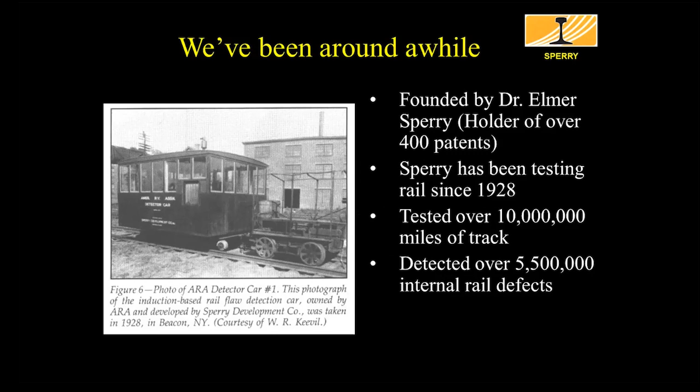These numbers are a little old. It said we tested over 10,000,000 miles of track—well, that was back in 2000—and they detected 5.5 million defects. I'm sure there's a few more now.

So Sperry Rail facts, as of 2000, this is what they said: they were the first company to provide the railroads with rail detection service. They were the world's largest rail inspection company, and I'm sure they still are. Now they've got over 90 years of rail flaw detection.

They had 58 vehicles when I was there. I went through the numbers—I could never find out exactly what it is, but when I would look at the literature, it said they had 58 detection vehicles. It was over 50.

One of the things somebody asked me: Bob, what's ASNT when you say 100 qualified ASNT operational staff? These are the people that would actually do the rail verification on the cars, approved by the American Society for Non-Destructive Testing. At the time, they were the only company totally focused on rail flaw detection. Pandrol Jackson would do it, but they had other things with Harsco and such. Sperry Rail always focused on rail testing.

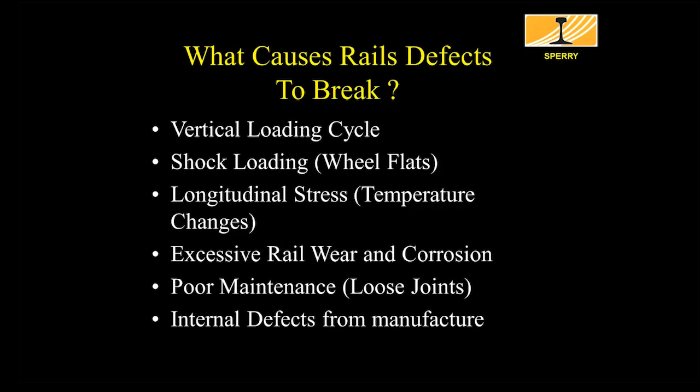And then of course there's internal defects from manufacturing. In the world of rail making today, it's less and less, but you can still have internal defects from manufacturing.

Funny thing, when we were at the Danbury Railway Museum, I had a picture of one of these cracked rails, and apparently Sperry must have given them the actual rail that was taken, that they took a picture of. So we had the actual rail along with the picture as part of my presentation.

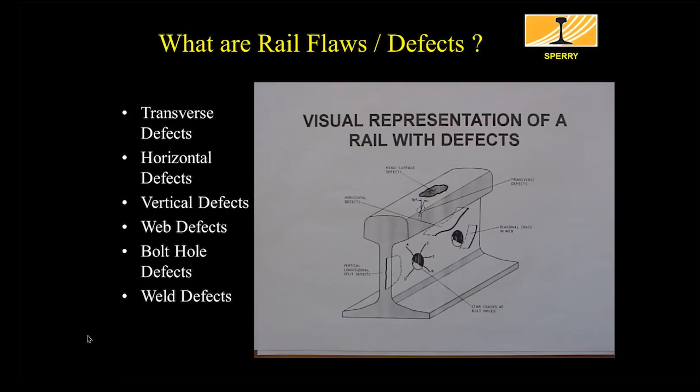And of course, now that we've got a lot more welded rail, you can get weld defects. You wouldn't have had those back in the early years because it was jointed rail, but certainly weld defects are things that can happen. So transverse defects, well, there's one.

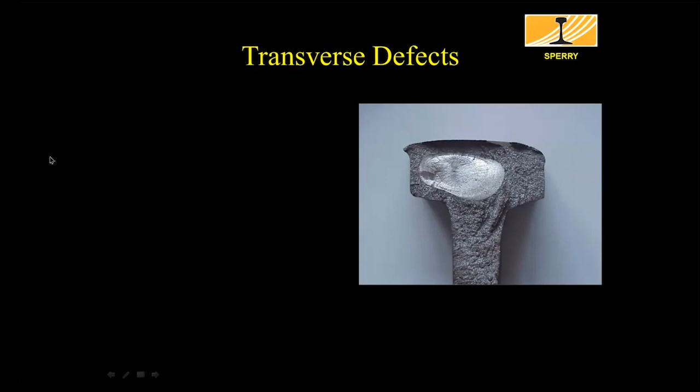This would probably have grown from that little pinpoint defect, and kind of like tree rings, as this thing would grow, you would detect it. So there's transverse fissures, compound fissures, detail fractures, reverse detail fractures.

These transverse defects, as you're going along with the rail, are usually at a 10 to 20 degree incline against the flow of traffic. Something like this obviously is a big problem. We would measure these things ultrasonically and find out how big they are. If you found a small defect and it was within guidelines, you wouldn't have to remove the rail or the piece of rail that had the defect.

This one, yes, the rail probably broke, and that's why it's there. But you'll measure it over time as you continue to inspect the rail.

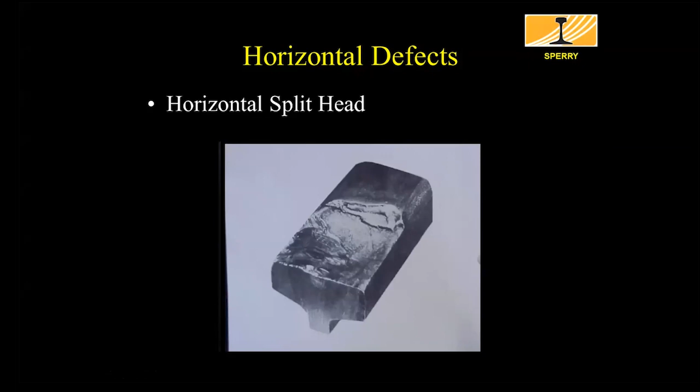Well, a horizontal split head. It's pretty well defined. Again, you can have them in the web, which would give you a cracked web, but that's an actual split in the head.

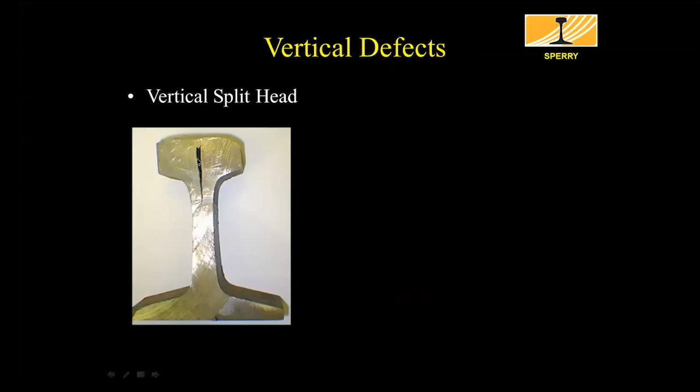This was taken on the Sperry Rail test track that was in Danbury, and you can see how it's just broken right through. When I was out in Pennsylvania riding on one of the high rail vehicles, we had the track out. There was a big vertical split head.

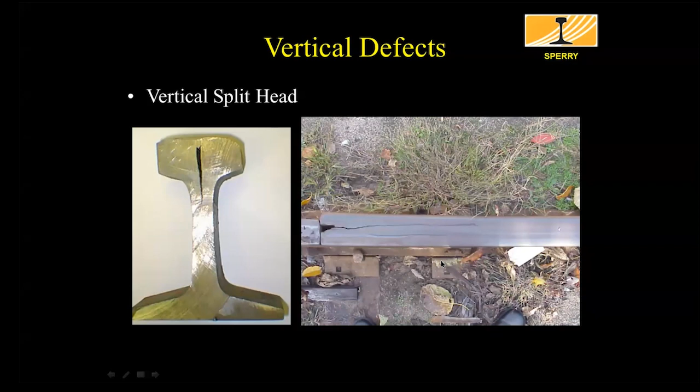Well, we shut the railroad down because, first off, you're on the track, but then they actually took the track out and replaced the rail that day because there was a vertical split head that ran quite a number of feet. Half of the head of the rail could have fallen down while the train was going over it.

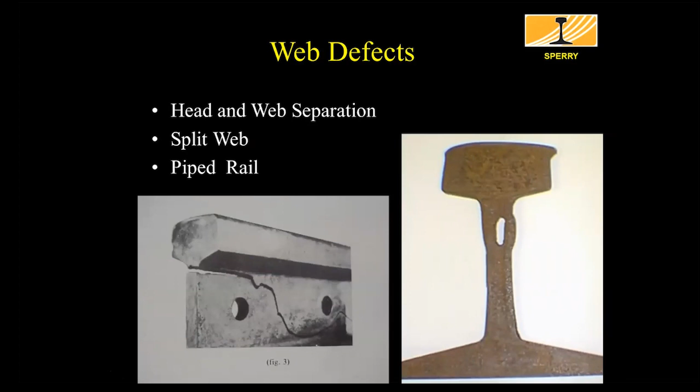So, yes, you can get web defects. And then we were talking about the bolt hole cracks.

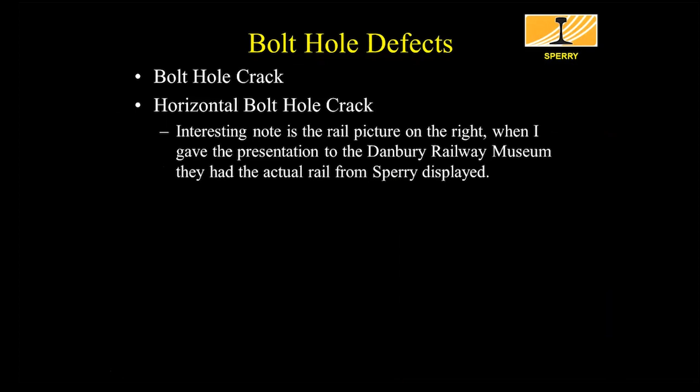Something I only found out when I saw a presentation last Wednesday over at Danbury. They were talking about what induction can do, and induction will not detect bolt hole cracks. I didn't realize that. Obviously, induction focuses on the head of the rail, but the ultrasonics give you all the good pictures of what's going on below the head.

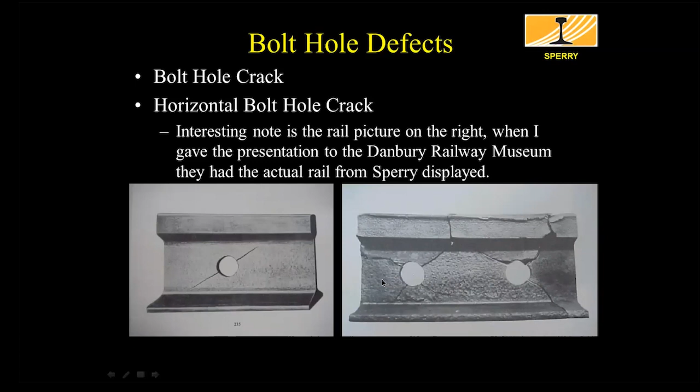With weld defects, this is what happens with the weld. The failure obviously occurs before you can see it. They grow very quickly once they develop, and service failures result, as you see, in a complete break on the head, the web, and the base. It just usually goes right through.

Well, now you've seen some of the defects. How is it detected? Well, the induction method is a surface and subsurface railhead method. That's what Elmer Sperry brought to the table back in 1928, putting a current into the rail and using a coil, checking to see readings when there were discrepancies.

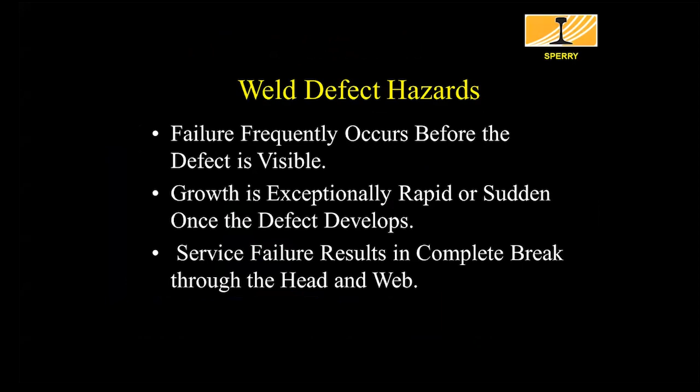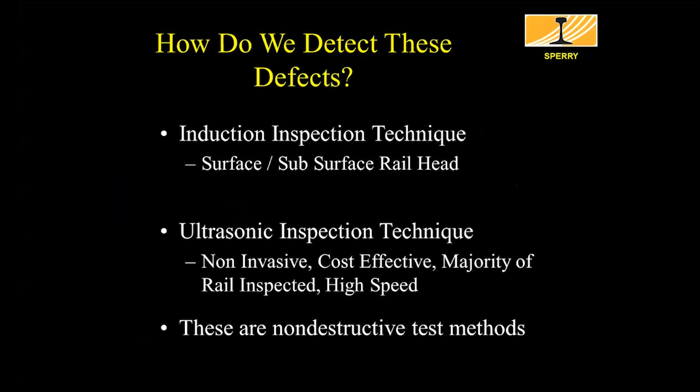So ultrasonic inspection is also called pulse echo. It's non-invasive, cost-effective, and this is what really gives you the picture of what the defects are. We're going to see a little bit more about how that's done. And again, these are all non-destructive test methods. You can certainly break rails and say, oh yeah, it's got a defect, but you can't do that when the rail is down, when the track is down on the ties.

Eddy current inspection would be very similar to the induction method of rail detection, energizing the rails and then detecting to see if there was a defect in it. Some of the original cars that they used back in the 30s.

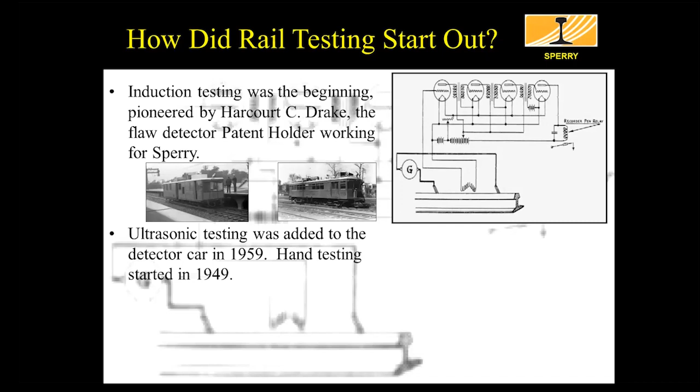And ultrasonic testing, Tom DeJoseph mentioned the other night that it came from Germany. I don't know if the RSU or the ultrasonic testing really did come from Germany, but they started it in 1959, according to Dr. Robin Clark. The hand testing was started in 1949, and you'll see when we take a look at the transducers why ultrasonic testing was a much easier way to find defects.

On the big cars, you'd normally have two ultrasonic roller search units, and you'd have the induction right next to each other. So we're going to see a little bit more about that too.

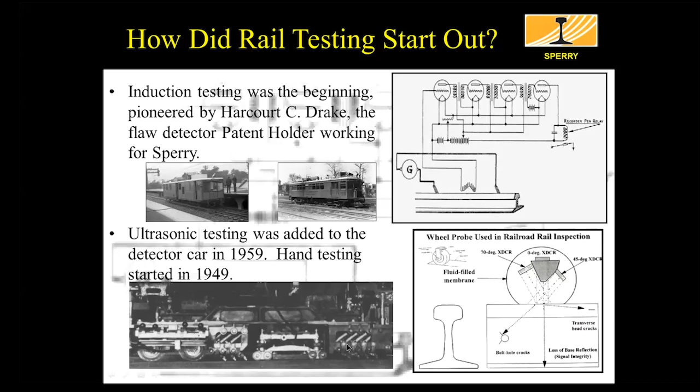So when you're going down the track, you can inspect both rails at the same time. And you can see that there's a lot of defects that you can find. The only thing that you can't find is a broken base. But chances are, if it's a broken base, the rest of the rail's intact, it may not be too much of an issue. And again, I just found out the other night that the induction testing did not detect bolt hole cracks.

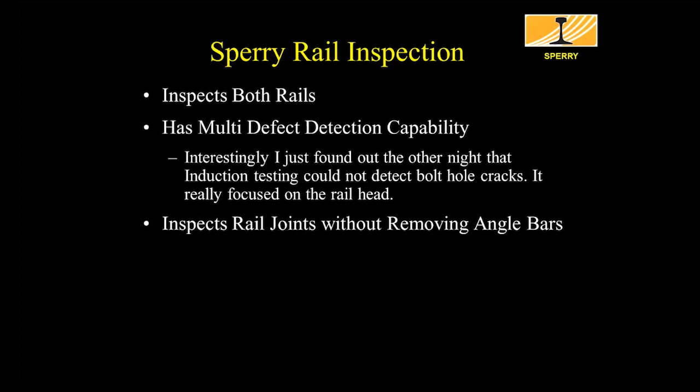So, and that's interesting because they were testing rail and jointed rail. Now you can inspect the rail joints without removing angle bars because ultrasonics will do that for you.

The other thing that rail inspection does, they give you a permanent record going back to the 20s and 30s and 40s and 50s and 60s and 70s, probably to the 80s. They would use paper tapes that would indicate what the defects were, and then they would record what the defects were all on paper. Once computers came in, they were able to use computer screens, in fact on the tubes, not just what we have today with the flat screens, and they could record the defects and have a permanent record on a computer.

So that was really a big thing that was going on in 1999, 2000. But they have the largest rail defect database in the world.

This is a very, very busy schematic of what goes on. But basically, you're going to put a pulse out every 1/6 of an inch on the RSUs, checking down, shooting down and coming back looking for a defect. You're going to have an encoder that you're going to set to the milepost monitor so you know where you are, and that way you've got location information.

The RSU, the roller search unit, which is the ultrasonics, that's going into channels along with your induction signals. They're all being processed through at the time, 20 channels of signal processing. And you had two types of roller search units, so you could look straight down into the rail, and you could also just do the head.

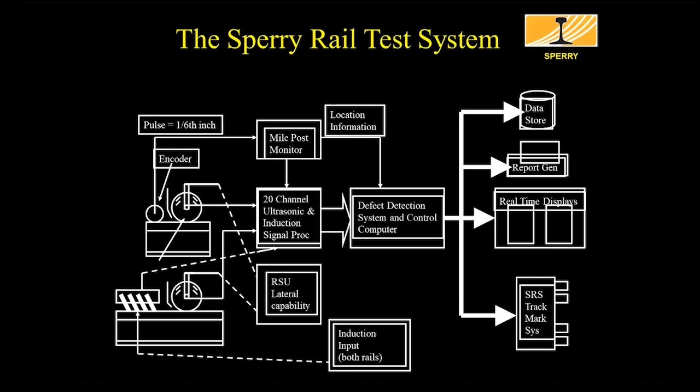And the other thing that would happen with all this is Sperry would have a track marking system that would shoot a glob of paint that would mark the defect, so that when you went to go see, well where is this defect, I've now rolled past it, now I got to go back up and verify this defect by hand. Well how do you find it? You look for the paint splotch.

So this is a better picture of what the roller search unit looks like. Dow made the tires. They're filled with ethylene glycol. Water would be sprayed onto the rail as couplant, so that the transducers shooting into the rail would go through the ethylene glycol, through the tire, through the rail, and then come back. That's what limited your speed, because the pulse of the echo going down looking for a defect has to come back through all these different fluids and rail. If you went too fast, you would miss your return signal.

So this, they called it the Omni RSU. It had a 0-degree transducer looking straight down, so it could see if there was any defects in the rail horizontally. They would have 37 degrees, which could catch your bolt hole cracks. And then they would have 70-degree transducers that would look straight into the rail. You saw that one nice transverse defect? Well, you can see how that would shoot and pick up that transverse defect that's at 10 to 20 degrees to the rail. So this is the Omni RSU.

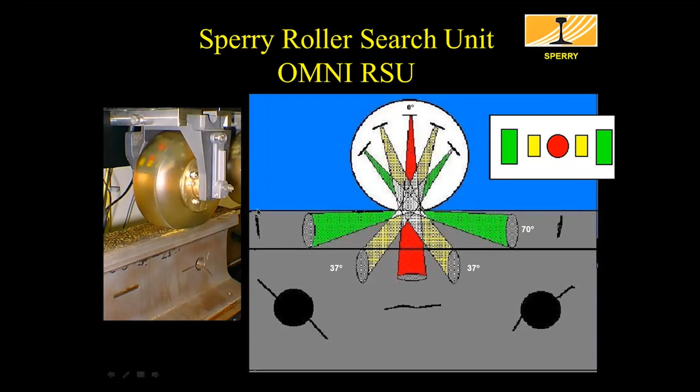Well, they also had a DF RSU, and this was a 70-degree, but if you take a look at how these are set up, it's actually looking to the side of the rail. It's not looking straight on. So this is another way that you would shoot a pulse echo in, and if you had a horizontal crack in the head, it would be another way of detecting any of the different head defects, where most of the defects do occur.

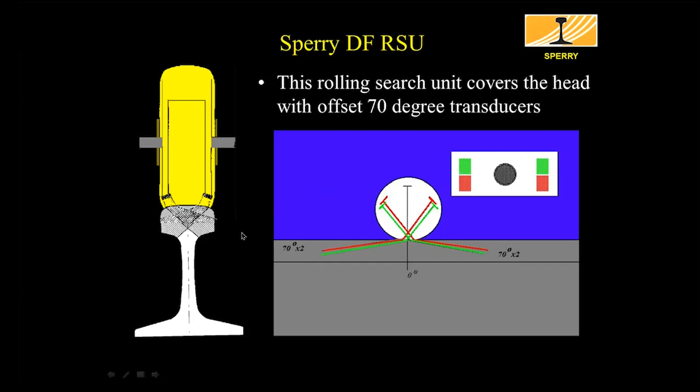And then Sperry got really clever and came up with a UX9 RSU, and that combined those two roller search units, all those functions into one. So you had 3 70-degrees. The limiting factor on these, how many RSUs, is if you didn't have enough capability in your electronic boxes, you couldn't use some of these different RSUs. So it was specific. If you had an older car, you might not be able to use a UX9 RSU, roller search unit.

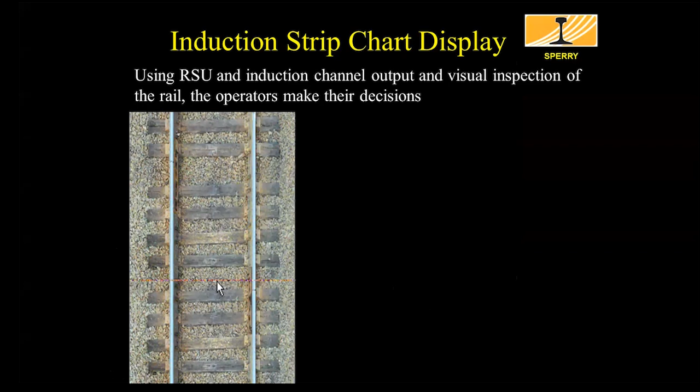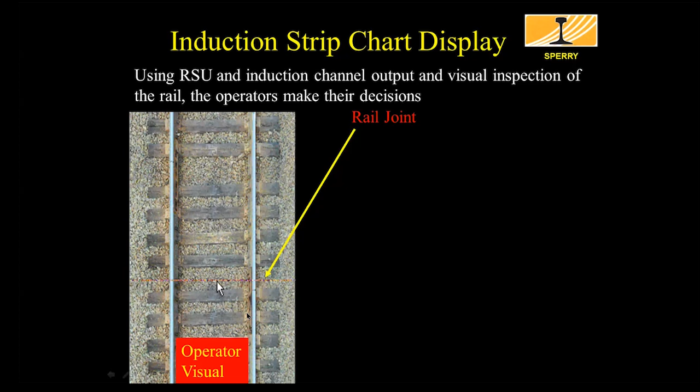So when the operator is going down the track, well, this is his visual of a rail joint. So he looks out, and you'll see some pictures of a very handsome fellow demonstrating this. As you're going down the track and you're looking, you see a rail joint, and that's the operator visual. Here he's going to see the rail joint. Well, what he's seeing on the analog equipment would be much more similar to what a paper tape looked like, your induction line is in the middle, and you're going over the bolt hole joint.

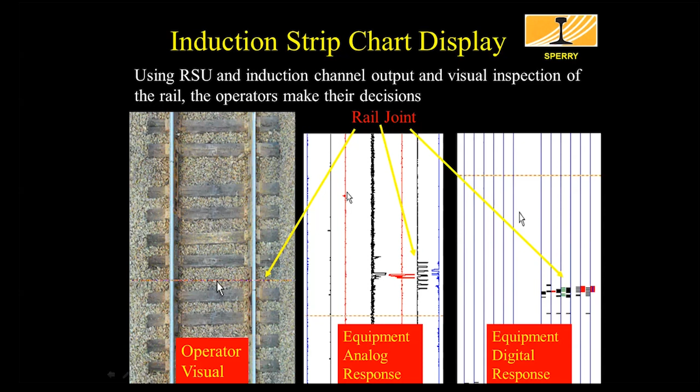But what they would do initially for the digital response is, well, here, we've cleaned it up. So we've gone from your analog meter, where you're seeing your, go back to when you were tuning up your cars, and you're reading what the points dwell is and things like that. Well, this is the cleaned up version. This is the equipment response that they would see now. So that's the digital equipment. And they would be able to mark on the computer screens if there was a defect.

So this one particular fellow - this is coming downhill, and this train was making pretty good time. We're all by the 804, and the guy, 24 years with Conrail, he's walking down the middle of the gauge. Because it's downhill, he doesn't hear this locomotive. So we're all yelling, hot rail, and then he turns around and looks, and it's like, oh - so you have safety manuals for a reason. Sometimes people forget. So we're glad that we were there to yell hot rail for the guy.

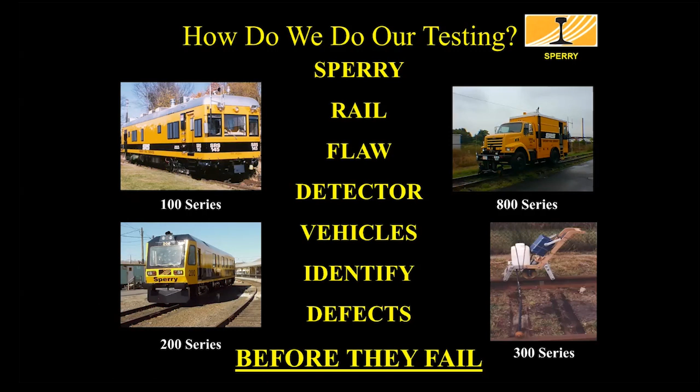The 800 series was an induction car, and they were Fords, then Ford chassis, then Sterlings, and Sperry built these cars. The 200 series was a big car that got shipped over to Norway. It was state of the art. You can actually see it here in Danbury, and we'll talk about that. And then you had what they called the 300 series - this was your hand testing, doing small industrial tracks when you didn't need a whole detector car.

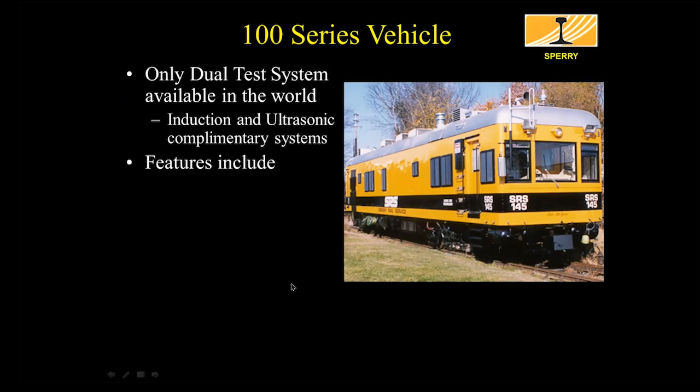So your 100 series, 145, I believe that went out when I first got there. Boy, it looked gorgeous. But at the time, it was the only dual test system with both induction and the RSUs, the roller search units. So they called them complementary systems, and they were. You could do 13-mile-an-hour testing, you could run 50 miles an hour light speed. One guy said he had it up to 55, but 50 was what they said they could do.

These cars had living quarters in them. Some of them had bunk beds, some of them had individual bedrooms, but there was a big demand for these up in Canada, where there were not places for you to hit a Motel 6. So again, they had the induction, they had the ultrasonic.

Now I'm going to go into chase car technology. Before I go to that - right here, there would be, when you would do your hand testing, the car would have to back up to where the defect was. There would be an ultrasonic reflectoscope here, and you would bring the car to the defect and do the testing. So that was stop and go, stop, back up. You use your buzzer systems.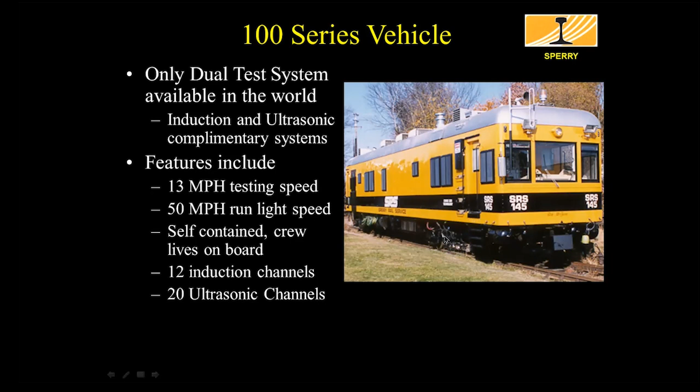So Sperry came up with chase car technology. What chase car technology was - remember, you painted where the defect was, and you would have an encoder telling you where it was from the mile marker. So what would happen is the chase car would come down behind you, and they would do the verification, so you would not have to do a backup move, get off the car, get back on the car, go. It was just eliminating the stopping of the detector vehicle. So now, using the radio, they could transmit the data to you from this chase car. He would do the down on the ground checking of the defect by hand and sizing it and making sure you knew what was going on.

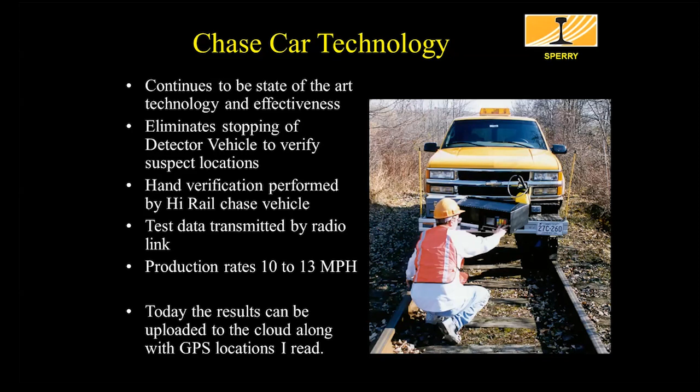Today, the results can be uploaded to the cloud with the GPS locations - this is what I read. So this was a way of increasing the efficiency of your cars. And you could do this with both the high rail trucks and with the big cars. In fact, sometimes they were built in - the trucks were built together with the chase car when they were commissioned.

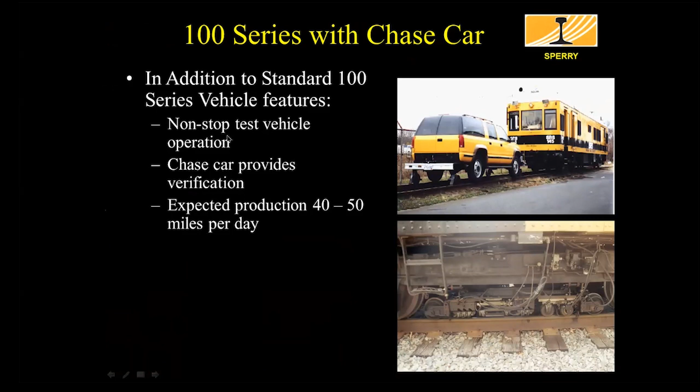So it really provides for a much better way of doing your testing.

Now the 800 series, originally they start off as Fords. These were the high rail vehicles. They could run easy on and off track. We'll show you a picture of that. Again, limited to the 13-mile testing, and they could run 30 miles an hour on the track.

You had these Fairmont rail that went down, and your driver wheels would actually run on the rail. So it's like, yeah, you know what, 30 miles an hour, when we were doing 30 it was fast enough.

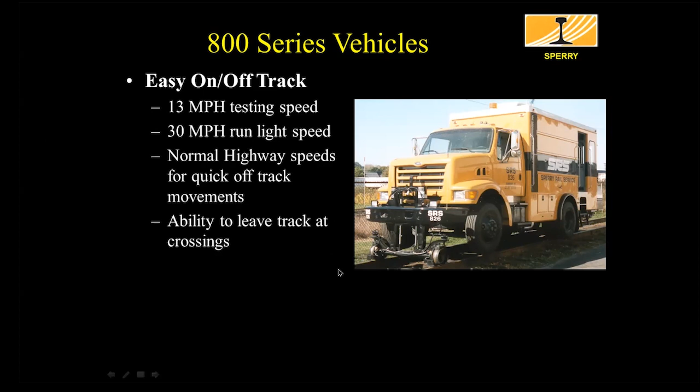So you could run at normal highway speeds. You could leave the tracks at crossings, and they had the ultrasonics, and you usually wound up in a Days Inn or something like that, Motel 6. You wanted to save your money, I guess, when you're out on the road. But you would drive to the motel, and you would drive down in the morning, and you would get on the track where they wanted you to get on the track.

And most of these had the electronic strip chart. All the ones that I saw had the electronic strip chart. I don't know if they had any paper tapes.

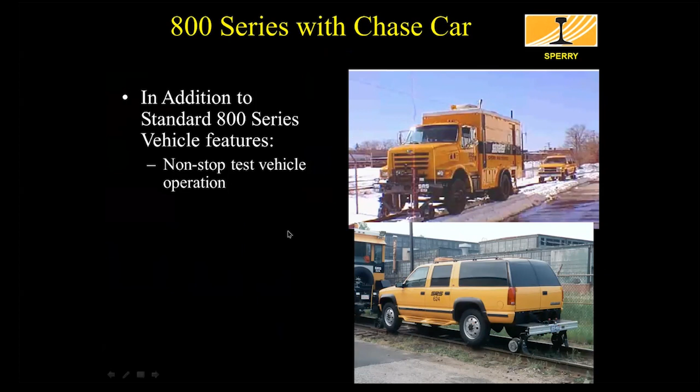So, again, this is just talking about the chase car verifications.

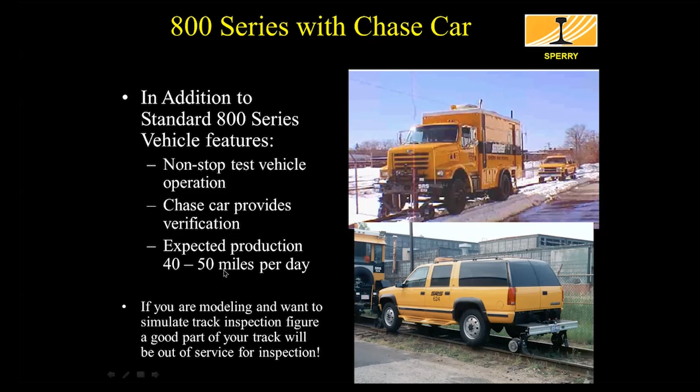And it always seems to be the same 40 to 50 miles per day that you're expected to get from testing. It obviously will vary with how many defects that you have or what kind of interruptions you have with the railroad. But if you're modeling these things and you want to inspect your track, you better plan on having your main line taken out of service for a while, because unless you're a 2-track main or 3-track main, you're not getting around these vehicles quickly, and they're not getting off quickly.

So in 2000, this was the 900 series high rail induction cars, and these were, for the first time - I'll show you some pictures - they were actually adding ultrasonics or adding induction testing to the high rail trucks. This one was the very first one. I saw it being built in Danbury.

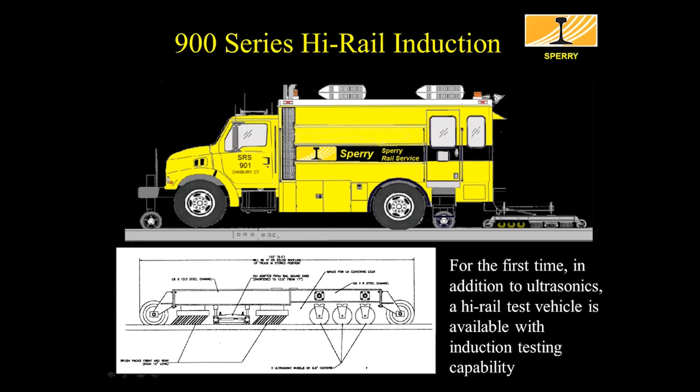So now, where you could only get this in the big cars previously, now you could use the induction method. You can see the brushes there. You can see the detector. That's what was here in this test bed.

The other thing that they had with the high rail, and I drew this from a PDF - I was so proud of myself. Tom still doesn't know how I did it, Tom DeJoseph, but well, he hasn't worked there almost as long as I haven't.

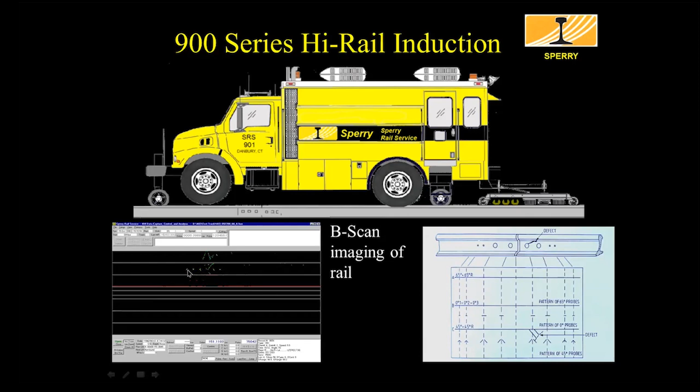They had a much clearer picture of what the defects looked like. So when you take a look and you see your bolt holes and you see a defect and you see the rail joint, you start to see here that, oh wow, I'm looking at these defects more as a photograph than as an indication. So that was B-scan imaging, which was just coming of age when I was there.

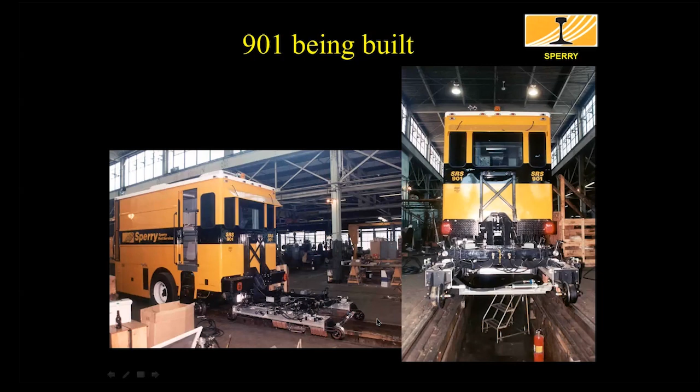So 901 was being built. Here we are in the shop. You can see that the Sperry shop had a rail, 2 rails down the center, and you could have multiple cars stacked up in there. But this was the very first ultrasonic and induction car.

So this was the hype, that no other rail testing offers these features. Remember, induction is more complementary - if I'm testing rail, I'm relying on RSU. But the first one was available July of 2000.

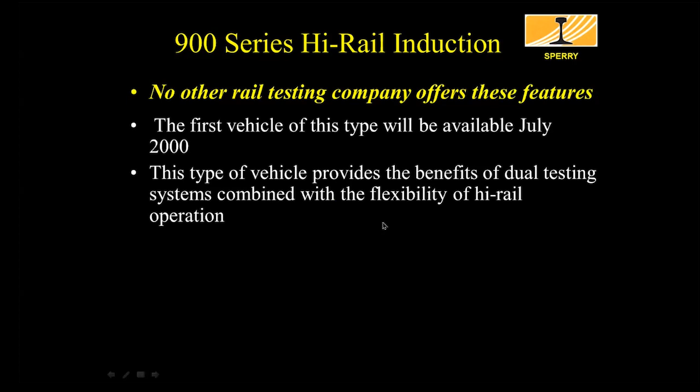Well, I left in May, so I can't tell you if it was there. So it had the dual testing methods, the induction, the B scan, and of course nonstop operation, chase car, and that was available in 2000.

Were these numbers and dates correct? We'd have to ask Tom. I don't know, but it's still 40 to 50 miles per day.

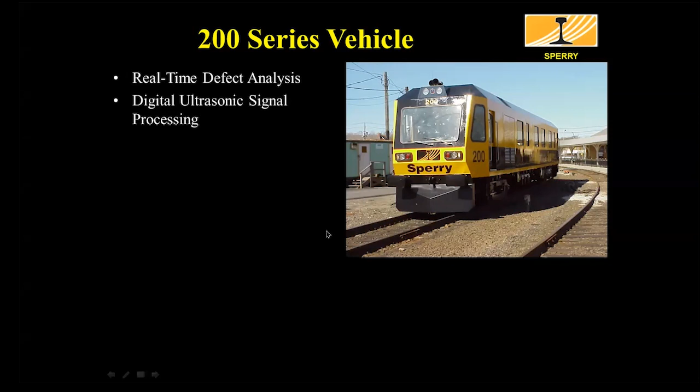Okay, this is the 200 vehicle. This was actually made in the shop. They welded the structure, but it was either 147 or 148 - they used the chassis for that and then dropped off this beautiful new vehicle on top of it. But it did have a lot of amazing stuff that it can do.

The processing allowed it to go faster. Physics wise, I still don't know how they could do it as fast as they did, but they could go faster and test, the high speed marking systems.

They could test in both directions, which the big cars, you only tested in one direction. You had the front of the car and then you had the back of the car when you were looking out, so you're always looking at the rail as it was going by. This would test either way. So this was pretty unique.

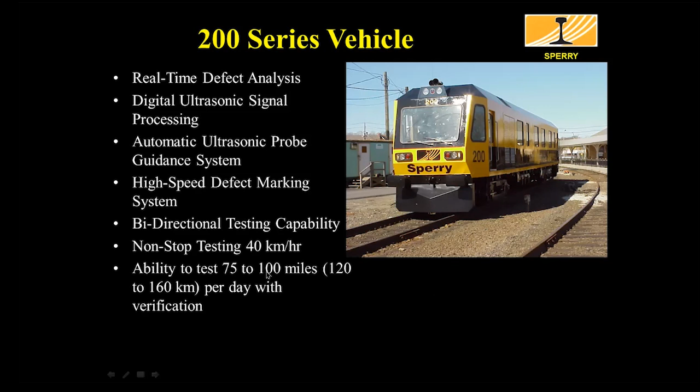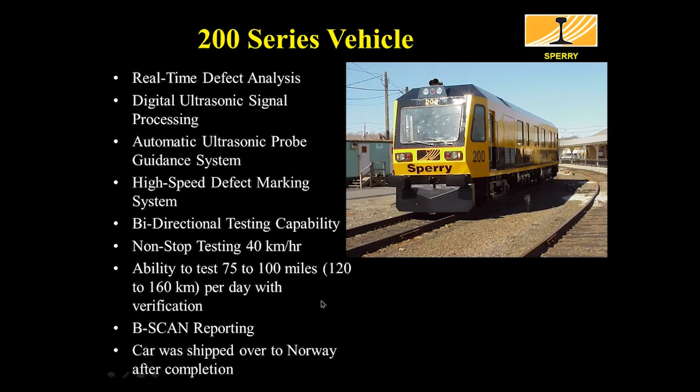And 75 to 100 miles. Now, what did they get? I don't know, but I know that car has been over in Europe, and apparently they did quite well there. But it was a beautiful car, and I remember Tom DeJoseph, when he christened it, said he never expected to see another big car built at Sperry Rail. Well, they built one more. I don't believe they built any more after that. But it was a beautiful car.

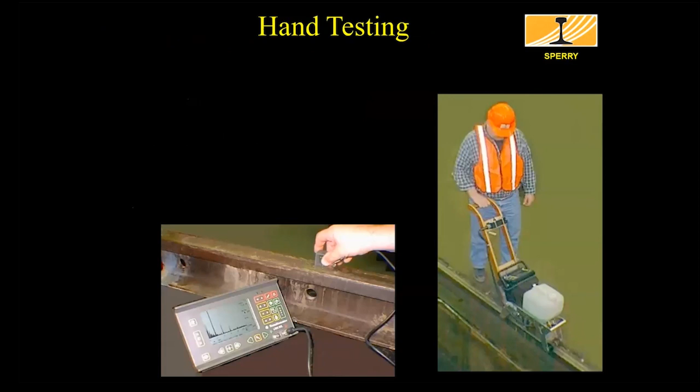So, hand testing. Okay, the hand testing units, again, here you're doing testing on an industrial rail. What you're seeing here is you have a search unit, and you're looking at this bolt hole, and you're seeing, oh, there it is, look, I've got a bolt hole. I can see this defect. So somebody's looking with a 0 degree, looking straight down, and he can see it.

So these were new Krautkramers. They were liquid crystal displays before you had like HP oscilloscopes, electrical displays. Oh wow, look at this. It's light, it's portable. It froze when the temperatures went to 0 degrees and you couldn't use it, and they had to pull out the old reflectoscopes. But when it was warm, these things were wonderful. They really worked very well.

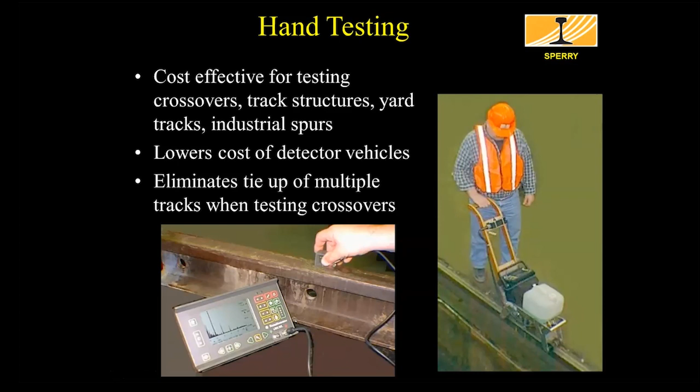But this is an example of what you would be doing when you found a defect in the rail. You'd have to test it by hand, and you could test it with a 70 degree, a 37 degree, or a 0 degree. All these different ways of testing rails, because you had to size these defects when you found them. So anyway, this was just the hand testing.

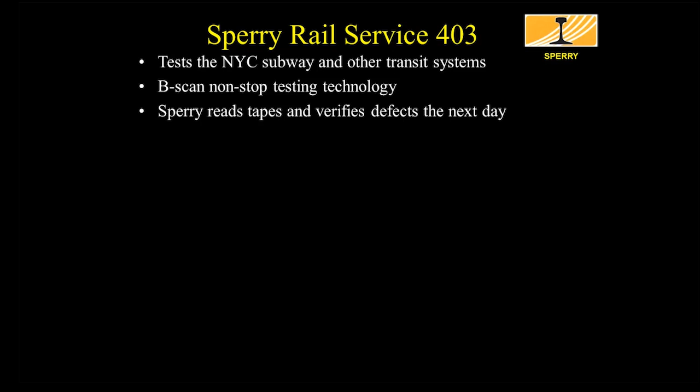And again, there were 10 of them that the New Haven got back in the late 40s, I guess. They never really went into service. They went to Remington and hauled gunpowder around the shops down in Bridgeport.

Well, the gunpowder bags sometimes leaked. And when they were cutting and welding with the torches, somebody got a really big surprise, and I believe there was an underwear change involved after it with the flash. So just one of the stories that were handed down. This was a very cool car to ride in the subways, though. You really got quite a view of the stuff.

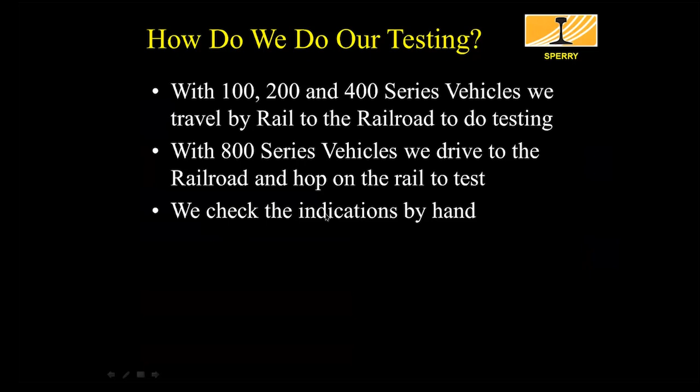So how do we do our testing? Well, with the 100 series, the 200 series, we got to travel by rail to get there. With the 800 series and the 900 series, you would just hop onto the rail wherever you needed to do it. I showed you how we would check indications by hand.

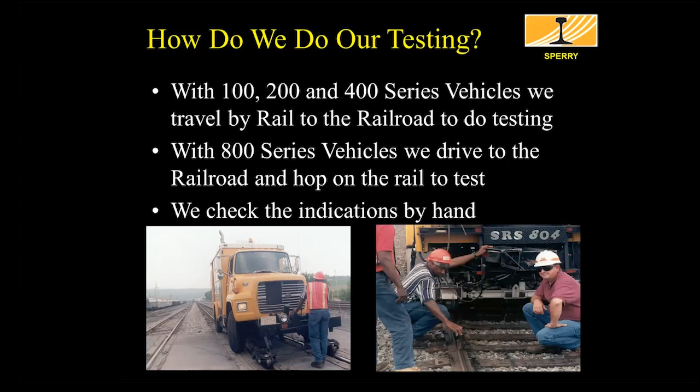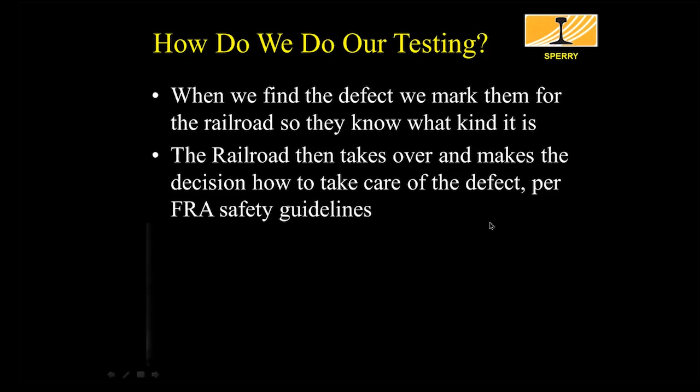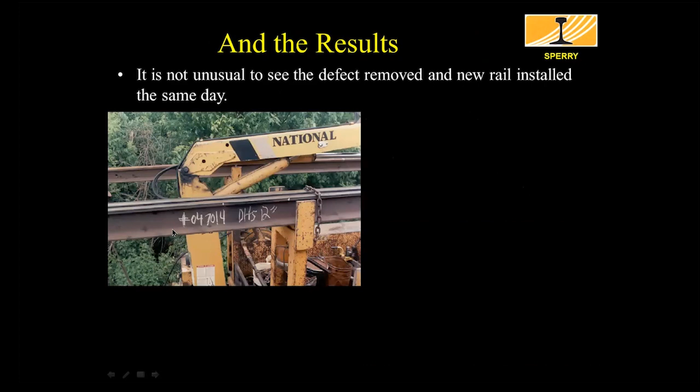It's not unusual, if there's a problem, to see the rails removed the same day and new ones put in. So we actually did see them remove the rail, and then they came out and welded the new piece in.

Bob, I do have a question I thought I'd throw in right now. Yeah, go ahead. So the question is, the person who asked says, I always assumed the test car was also measuring track alignment and track gauge at high precision.

Not so? Not so, not the Sperry cars. They talked about putting in video systems and adding that to get a vehicle that did more, but their focus was on rail. A lot of the cars you see in Trains magazine, the new cars, yes, they're measuring gauge, they're measuring ride characteristics and things like this. Sperry at this time, I don't know if they've added these features since, but their focus was finding those defects in the rail.

Sound good? Fine, thank you. Okie doke.

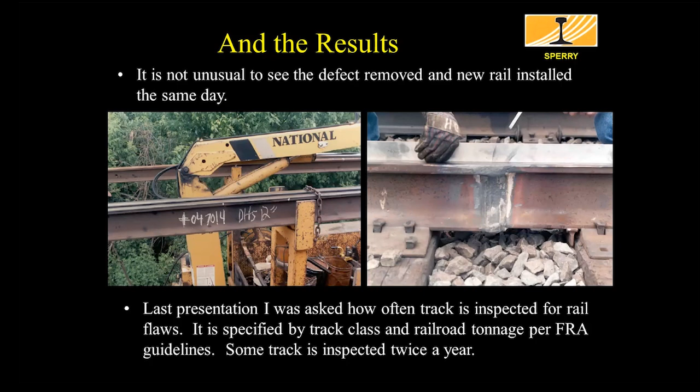So what else does Sperry do? We've covered a lot of the rail inspection, but they actually made their vehicles or had them made.

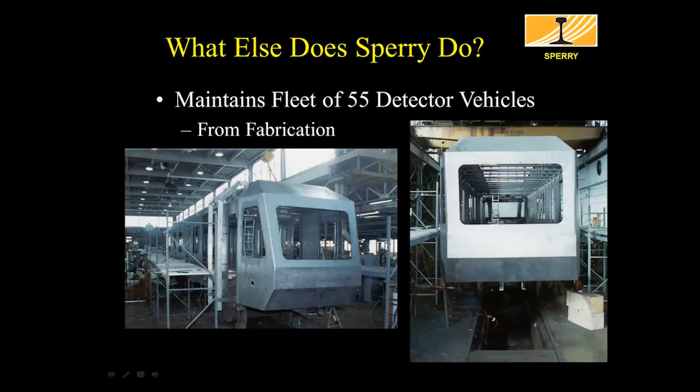So here is the 200 being fabricated in the Sperry shop. This was Alistair Veach's baby. It was quite impressive. They had people come in and do some of the welding, obviously, but that was the structure that was dropped on the chassis. Alistair did the design. He did everything. Amazing fellow.

I watched them commission 826, 827, 828, 829, and 200. I didn't actually participate in it because this was an engineering thing and I wasn't sure what was going on, but it was really cool to go sit in, and they had really nice, comfortable couches and wonderful air conditioning.

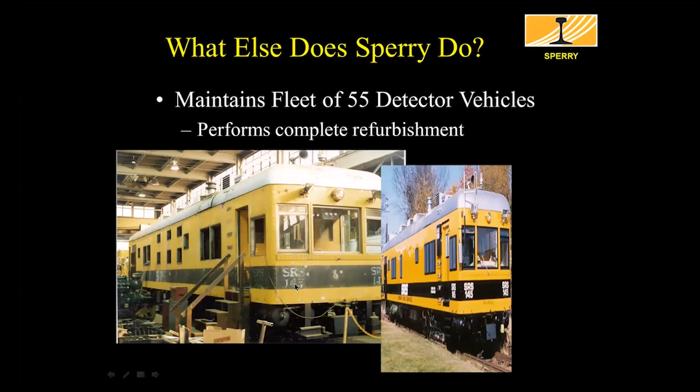And of course, they maintained these vehicles. They had facilities out in Kansas and some other places, other shops that would do the work. But 145, you saw a picture of it earlier. Well, this was when it came in for refurbishment. And when I say refurbishment, I mean these cars really got refurbished. The windows were out, everything was redone. This looked gorgeous by the time they finished it. And that's actually on the track outside of the shops in Danbury.

I forget, a number of them were named for old time employees.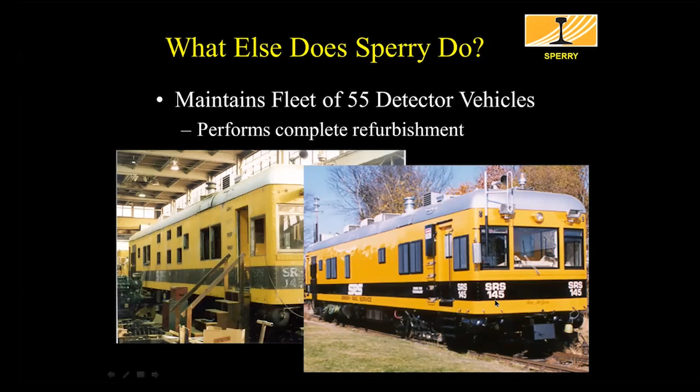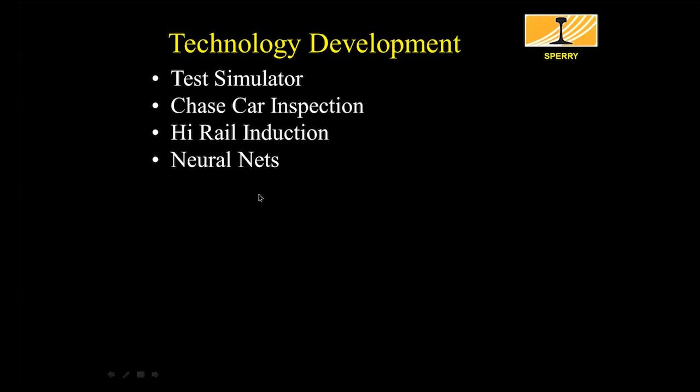So they had a lot of technology. They had technology development, they did test simulators. They came up with the chase car inspection, they came up with high rail induction, neural nets, I still don't know what they are, but I know that's what we were selling. I have a vague understanding of what neural nets were, how they worked on the railroad I'm not sure. And of course, new testing techniques, so there were your neural nets.

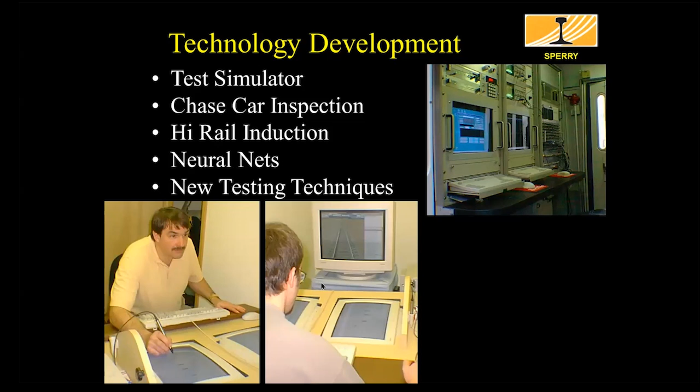And man, if he can't sell a test simulator, that was me like 24 years ago, when my mustache had color in it. What I'm doing is I'm posing. But what this guy is doing, this was their test simulator.

So they would have a track that was simulated like video games today, and then you would get the indications on the screens, and you would use this pen here. You would actually do the recordings of what the indications were. This way you didn't have to mark it on a paper tape, and this would all be downloaded to a database. And there I am demonstrating the pen.

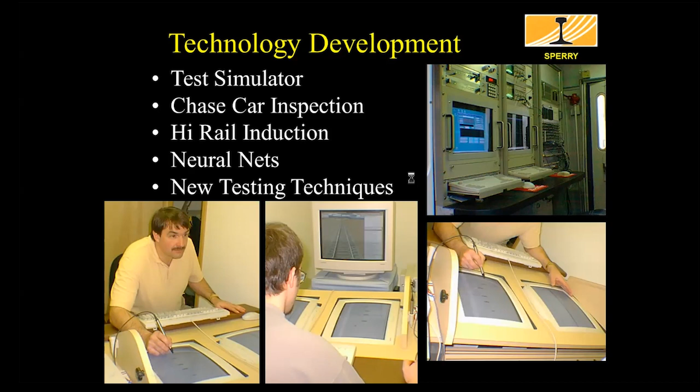So this is how I made it into the presentations when Tom would do these presentations for the railroads. But it actually was a very good way of training somebody. Rather than having to spend time looking over the shoulder on a big car, you could do it on a computer screen.

So field investigations, when there was a problem, well, Sperry had a department of 6 rail investigators that reported to a manager of field investigations that they would go out. If you had a problem after the rail had been inspected, well, they expected somebody out there, and what happened? So they were on call, especially after accidents. And sometimes Mike Shakinovsky, he would also be called out in cases of big defects. So they responded on site.

So what would happen is a thorough review would be done on site and of the Sperry test records. Remember, they have the largest test database, defect database in the world. They know where everything's been done. The paper tapes go back to the 20s, so they can check this stuff.

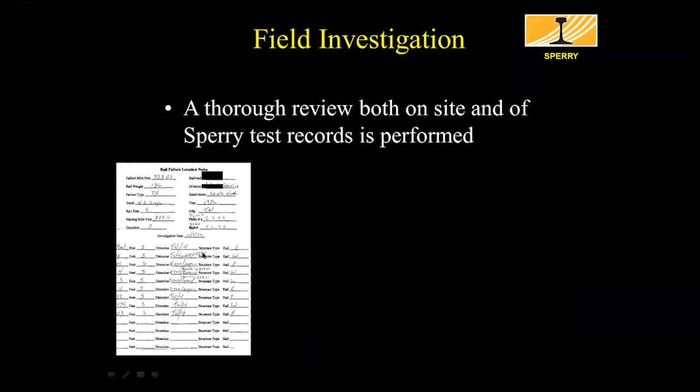And this is the information that the operators would be filling out by hand, which is why they probably liked doing it on the computer, so they didn't have to do all these types of defects. I never saw somebody fill these things out, but obviously somebody said, yes, I measured, here's a defect here, it's this big. Okay, well, I think we're up to like 55 minutes.

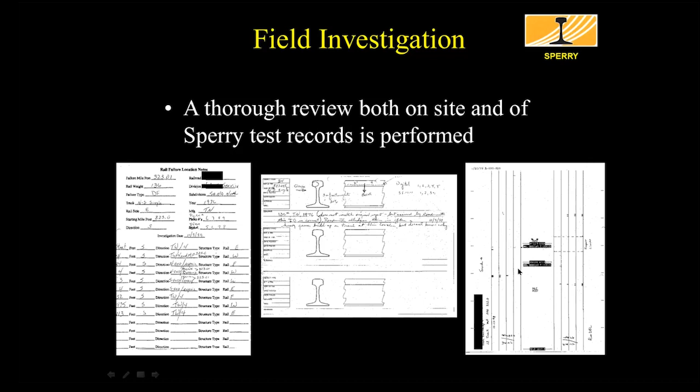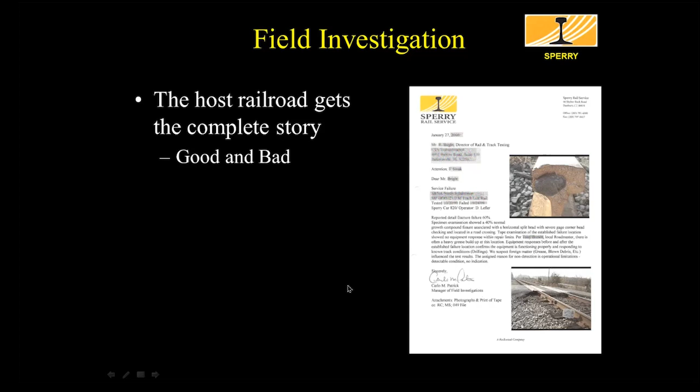And then there would be copies of the computer printouts that they would go through and inspect them. So the railroad got the whole story, the good and the bad. And this was an actual report that was done. It actually went to somebody in the director of rail and track testing, and it was from Carlo Patrick. And he tells them what was right, what was wrong, what happened.

We talked about collecting data. Well, one of the big things that Sperry was doing, there was a lot of access database programming going on, but they were looking to make reports. They were looking to put the defects in so that they could easily be found, develop software to say, hey, you know what, you want to check this the next time it comes out.

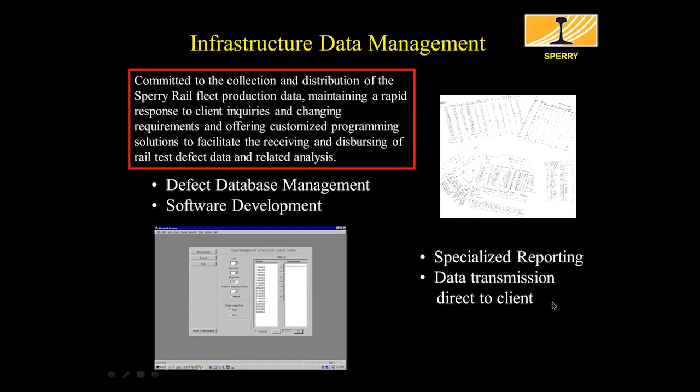So you can see that there was specialized reporting and data transmission to the client. This, 1999, 2000, well, that's kind of cutting edge of sending emails and everything else and sending this stuff. The web was starting to be used.

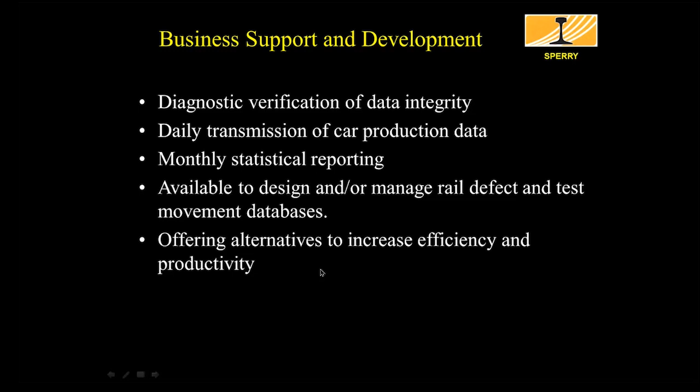So yes, the business support and development people, they would verify the data integrity. They would do the daily car production data reports. They would send them out. There would be monthly statistical reporting. I'll show you something in a minute and what it looked like. And they would design stuff so that people knew where their defects were and what they needed to do about these things, all only trying to make things more efficient and more productive using the computers on their data.

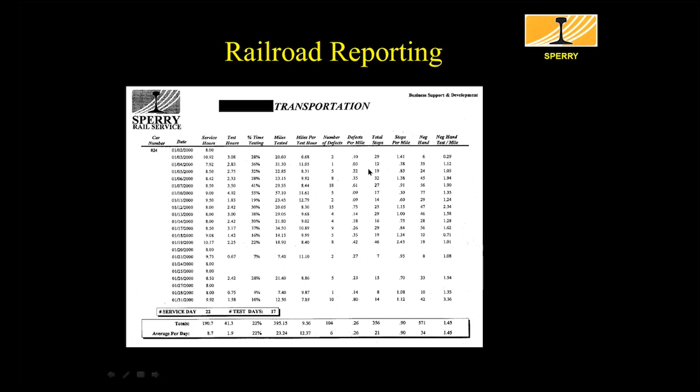Yep. Yeah, that's my notes. This went to CSX. That slipped.

They also had an ultrasonic training school, which was open to the railroad personnel by invitation. It's also how they train their folks on NDT in Danbury. Mike Shanofsky taught it. It was 4 days of classroom and 1 day of testing where you actually had to do the test and pass everything. And all those defects that you saw, well, they had examples of it and you had to find these defects.

Now it's actually the function of going on the rail and finding the defects, which is what the operators would do on the big cars and the high rail vehicles. You had to get 10 out of 12 correct to pass the test. There's only one person that got all 12 right in my class, and that person took 3.5 hours longer than anybody else. I think I was there till 9 o'clock at night.

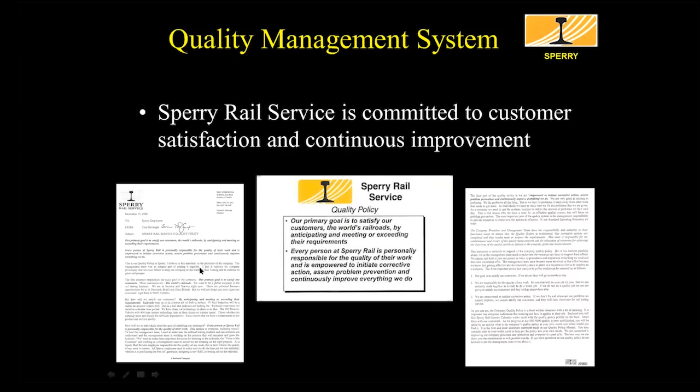But continuous improvement - we had our quality policy, which was required. I actually copied it from a solenoid valve company I worked at. I just changed this Honeywell Skinner valve to Sperry Rail Service and put things in like 'the world's railroad.' But this was the stuff we needed to do to get ourselves ISO registered. And Tom DeJoseph did back me up. He and I wrote up the quality policy and explained it to the people and why it was important to them.

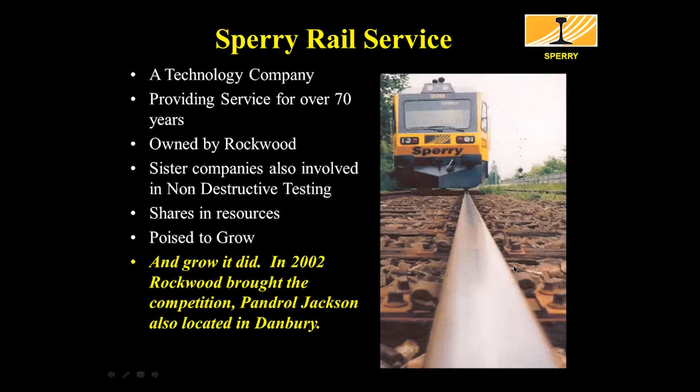And grow it did. In 2002, Rockwood bought the competition, Pandrol Jackson, also located in Danbury, so they actually doubled the business in size. It was very amazing. I asked Tom about this, he says they put that together very quickly after I had left, within 3 to 4 months they had this done.